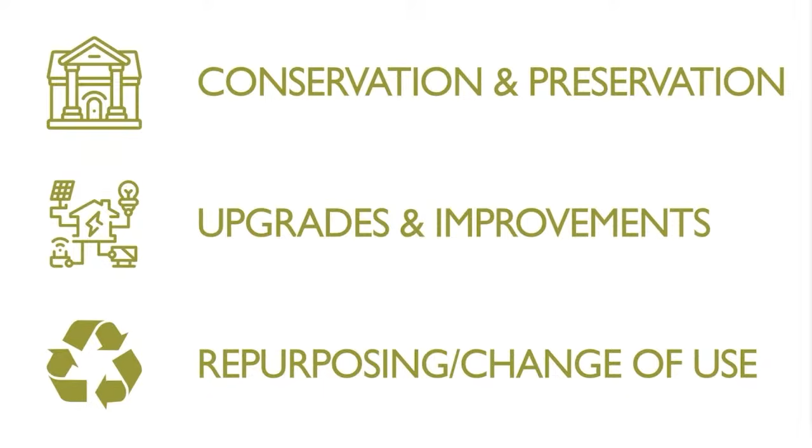Each of the three types of projects will require a different balancing of priorities and will necessitate a different set of trade-offs to meet the overall goal. Having a clearly identified and realistic outcome in mind before beginning works is therefore a very important part of the design process. Conservation and preservation projects, especially those on listed or historic structures, have a number of limitations that may not be present in other types of refurbishments.

Even if retaining the actual period material is not required, the preservation of the essential character and any decorative features certainly is. This requirement can place limits on the extent to which energy performance can be increased, or may restrict the approaches that can be taken to reduce air leakage or control condensation.

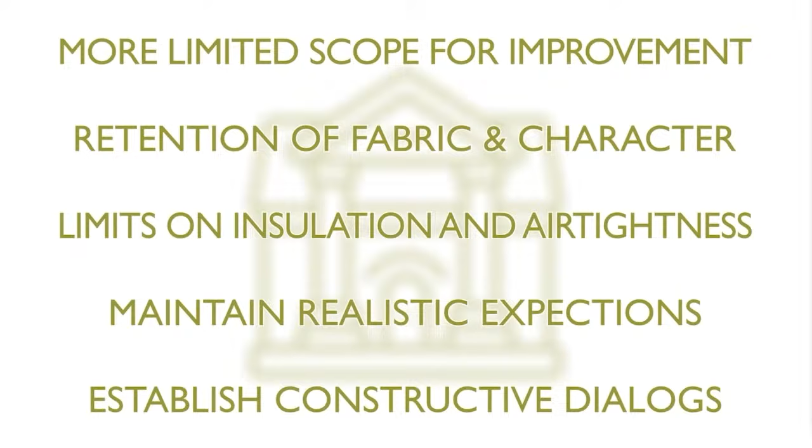Balancing the intelligent use of materials with a realistic expectation of what can be achieved, and agreeing a suitable approach with any regulatory bodies is an important prerequisite. Establishing constructive dialogue between designers, contractors and regulators early in the project cycle helps ensure costs and schedules are kept under control whilst delivering quality results.

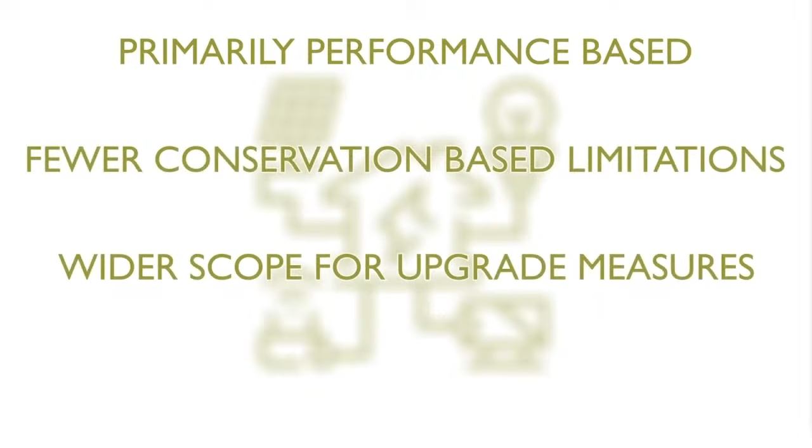Projects where the main focus is upgrade and improvement work flip these requirements so the primary concern is meeting a performance-based objective. That's not to say preserving features becomes unimportant, just that the balance shifts more in favour of enhancement than conservation. Although the layout of the building may still impose limits on what may be achieved, particularly in areas such as window and door openings,

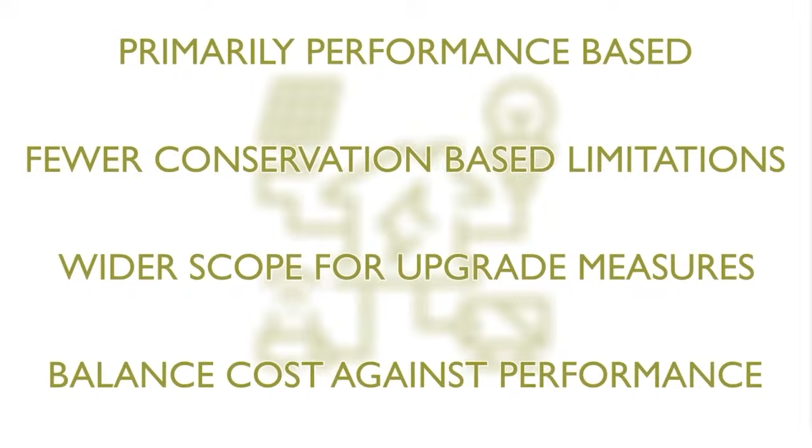there's usually a lot more freedom to accommodate fabric insulation, service runs and other modern requirements. Some thought must still be given to achieving this in the most cost-effective manner, as even without conservation considerations, making substantial improvements to the fabric performance can incur significant costs, if not carefully managed.

The last category is changing the actual purpose of the building itself, which can range from subdividing a large dwelling into flats to conversions of former industrial sites. Depending on the purposes of the building before and after conversion, each project will have its own unique challenges, with acoustic performance being a particular concern when converting from non-domestic to domestic use, as many non-domestic buildings, even relatively modern ones, were never designed to incorporate significant acoustic insulation.

In this case, as with thermal insulation, airtightness and controlling moisture, the critical first step in any project is assessing the performance of the existing building. This achieves two important aims: firstly, identifying and prioritising required works such as repairs, and secondly, establishing a baseline relative to which subsequent improvements can be judged.

While converting a bedroom to a home office or other basic DIY level projects have a pretty clear functional or aesthetic objective, larger scale refurbishment projects require a more structured and objective approach. We'll discuss these approaches later on, but let's begin by reviewing the basics of building physics and how that applies to existing building fabric.

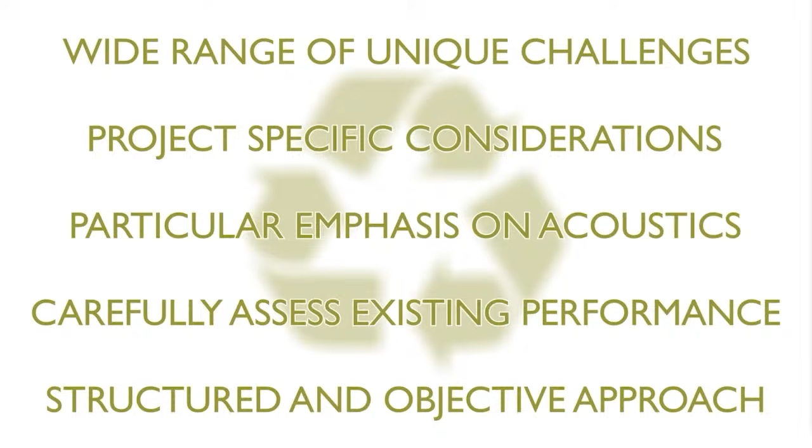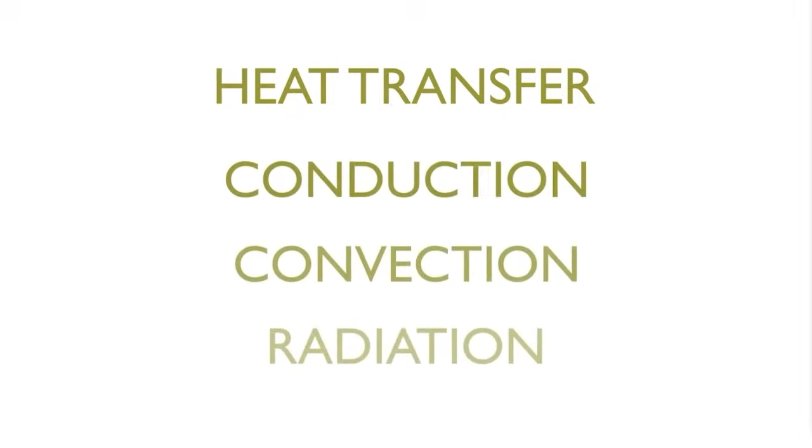The movements and interactions of heat, air and moisture are what influences most of the decisions we make when upgrading building fabric, so it's important to have at least a basic understanding of the mechanisms involved. Firstly, we'll take a look at heat transfer. There are three main mechanisms by which this takes place: conduction, convection and radiation.

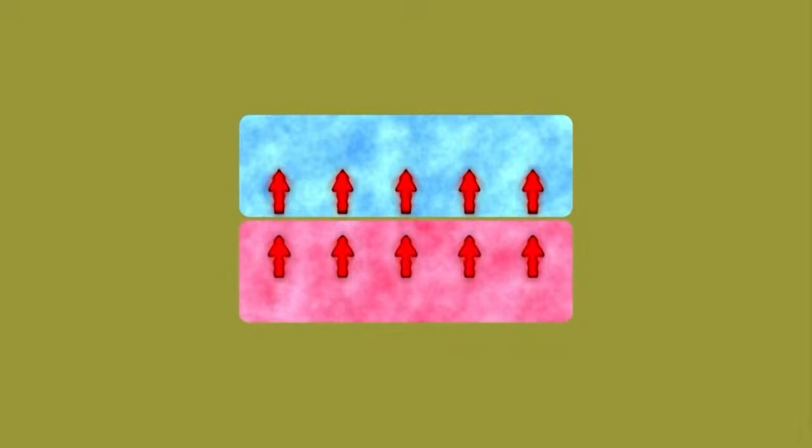Conduction takes place when two objects are in direct physical contact and the heat energy transfers from one to the other. This process will continue either until the contact is broken or the two objects reach the same temperature.

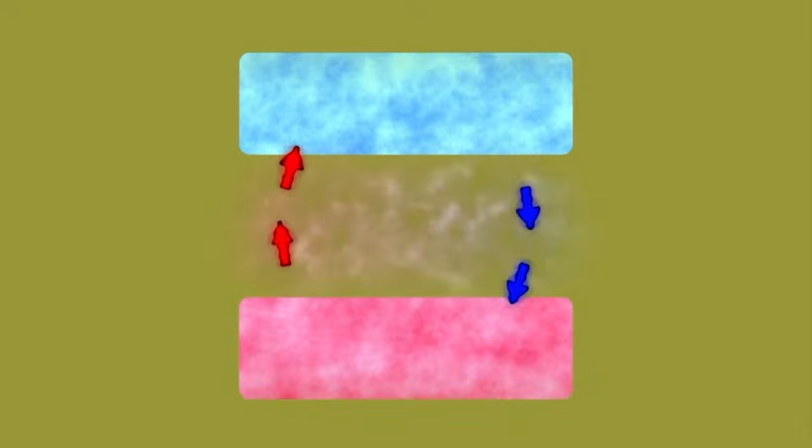Convection is when heat is transferred by a fluid medium, such as air or water. This happens because where the fluid is next to the warmer surface, it heats up. The warmer fluid is less dense than surrounding cooler fluid, and so rises up and is replaced with cooler fluid, and the process starts all over. This sets up a circular current, moving heat between the two objects, which will occur until this movement is restricted, the fluid is removed, or the temperatures equalize.

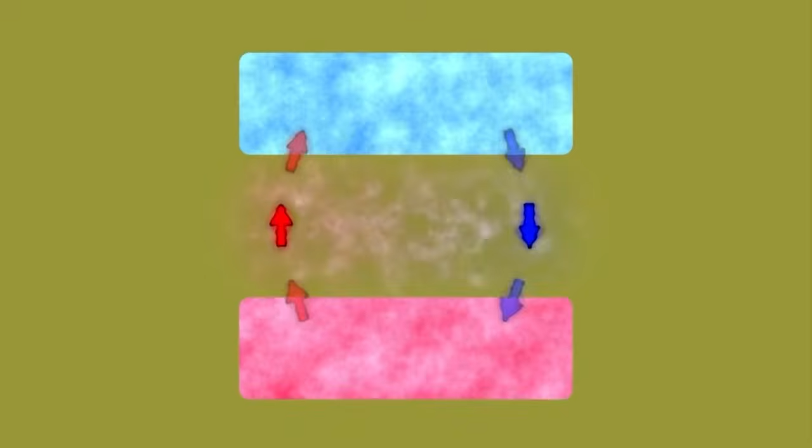Radiation is the final mechanism, and in this case, heat is transferred directly by means of infrared radiation. The first object emits the radiation and the second absorbs it. The rate at which the energy is transferred is determined by the emissivity of the respective materials.

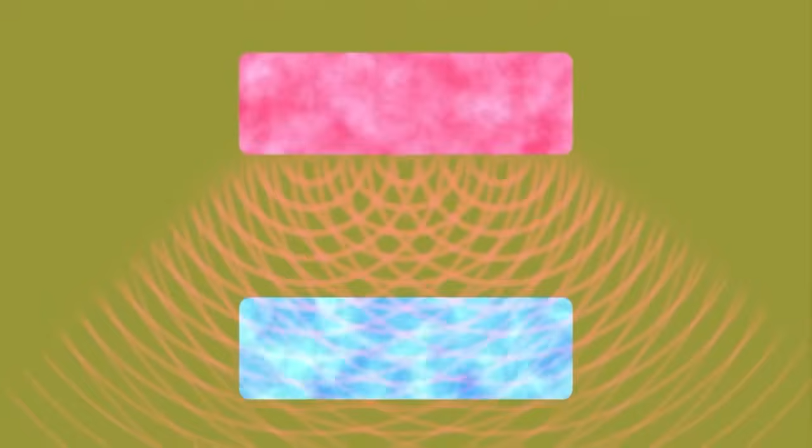In building context, these properties interact in various ways, but for a simple example, let's look at a timber frame wall with insulation placed in between stud-work. This insulation, let's assume it's a mineral fibre, has a thermal conductivity of 0.035 watts per metre Kelvin.

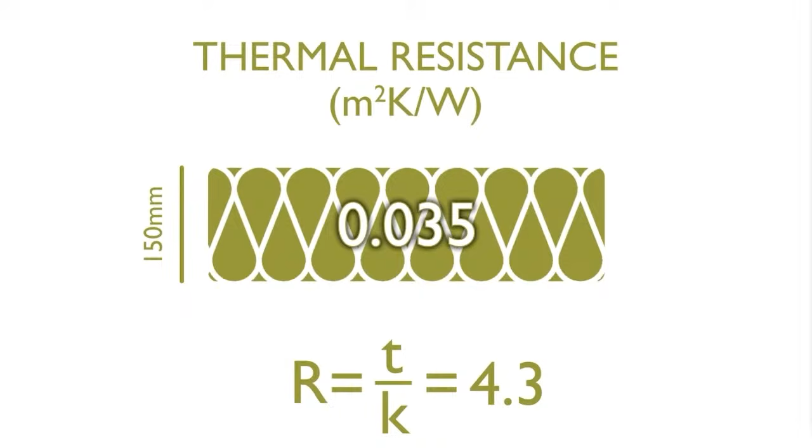This property is a constant, irrespective of the thickness of the insulation. This is also known as a K value or lambda value and is a measure of how well heat flows across the insulation. If we have 150 millimetres of this insulation, we can divide this thickness by the thermal conductivity to give us a thermal resistance, or R value, of 4.3 metres squared Kelvin per watt. This does vary with thickness and is linear. So if we double the thickness, we double the R value. The higher the R value, the better the material resists heat transfer by conduction.

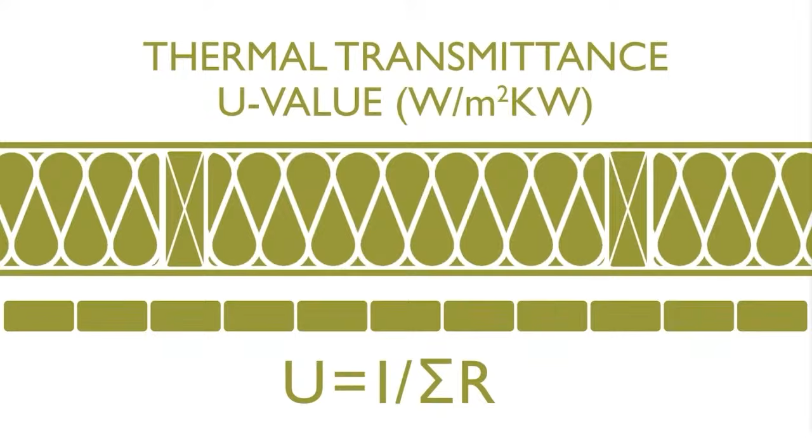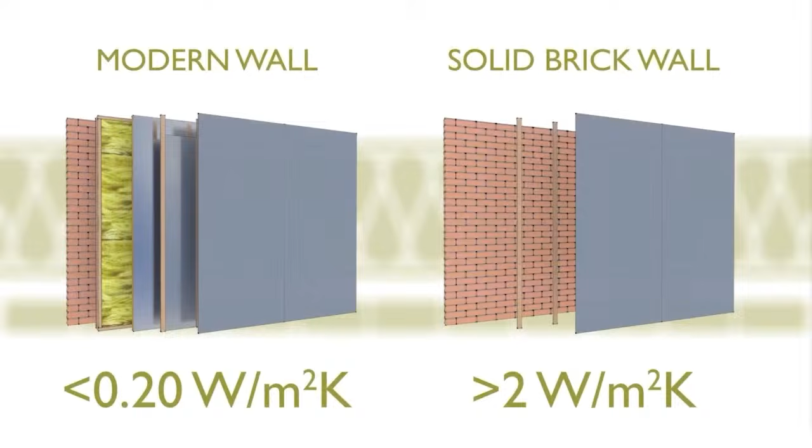The amount of heat flowing through the entire wall assembly is quantified using the thermal transmittance, or U value, which we calculate by adding all the R values together, then dividing one by the result. The U value is measured in watts per metre squared Kelvin, and a lower result is better. Old, solid or stone walls will have a U value of 2 or higher, while a modern new build timber frame wall will be below 0.2. So this really is an area where substantial improvements can be made in older properties, albeit not always easily.

The simple U value doesn't tell the whole story, however, as not all the layers in our example wall are continuous. The insulation in a timber frame wall is typically between studwork, which has a higher thermal conductivity and therefore will allow more heat flow.

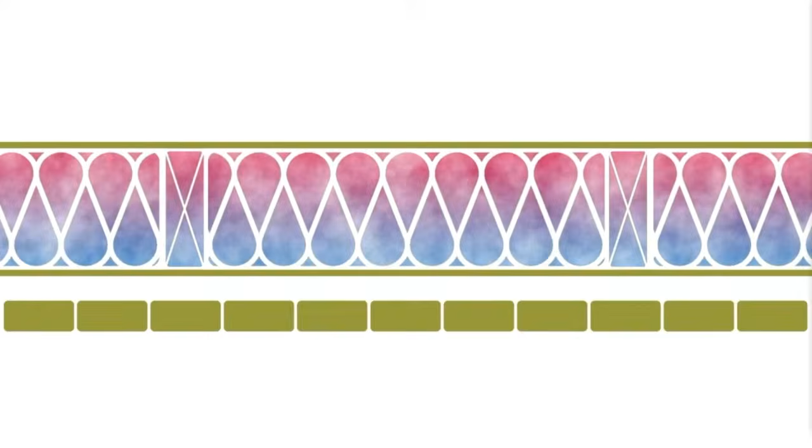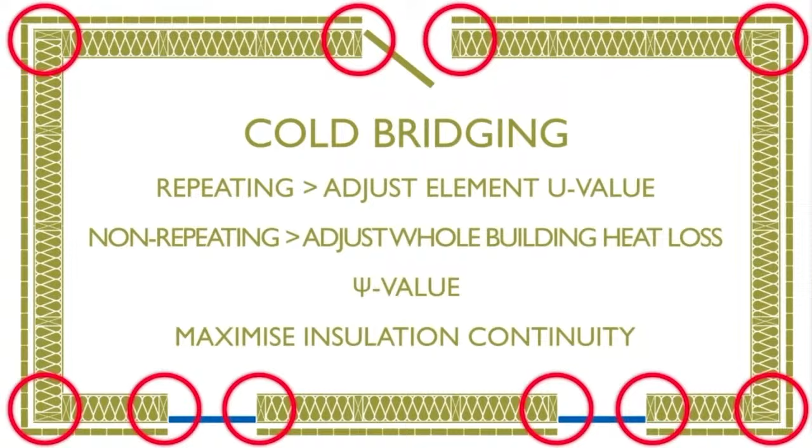There are also windows, doors, corner junctions and floor zones to consider, all of which will affect the local heat flows. This phenomenon is called cold bridging, and we account for this by adjusting the U value of our wall to account for additional timber, and then applying a correction called a psi value to account for the corners and floor junctions.

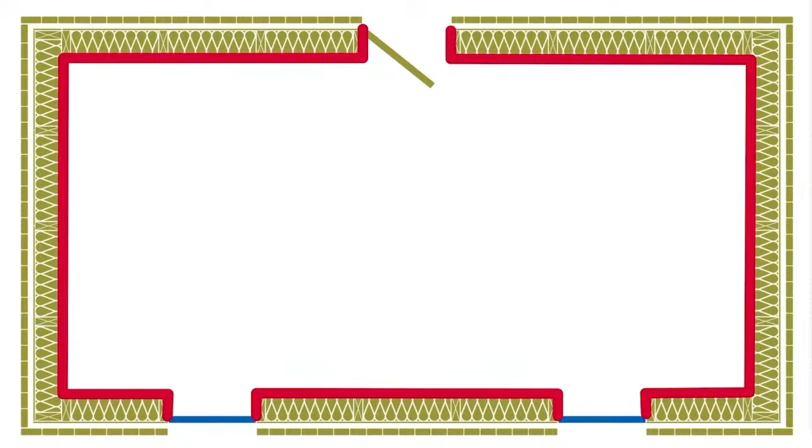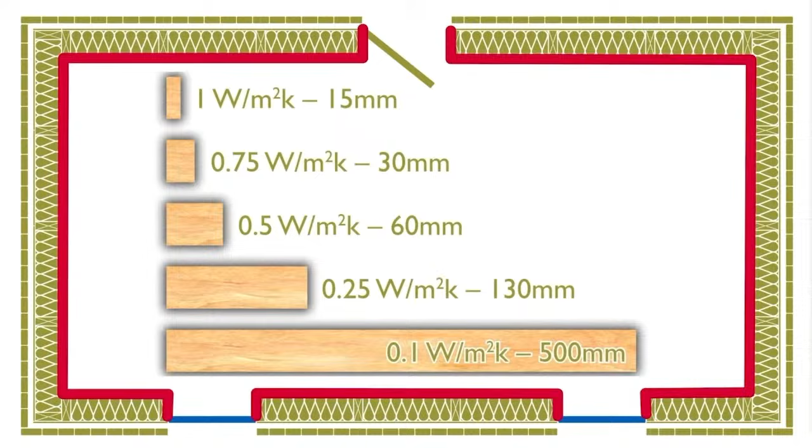The other main area where we can improve our energy performance is by reducing heat losses through convection. This means ensuring unplanned air movement in the building is minimised. Gaps, cracks and poorly sealed penetrations in the building fabric can all allow a substantial degree of air movement, which not only means cold air entering the building in the form of drafts, but also warm air leaking out.

Residents of old houses will be all too familiar with drafts, and how much difference basic steps like using a draft excluder or taping closed old sash and case windows over the winter months can make, and when applied to an entire building it can add up to a dramatic improvement.

The main benefit to reducing air leakage is that it doesn't necessarily add any thickness to the wall or roof, meaning in older properties space can be maintained and period features can be preserved. There are a few ways to improve the airtightness of older properties, which we'll consider later on, but it's important to consider the effect it can have on moisture in the building.

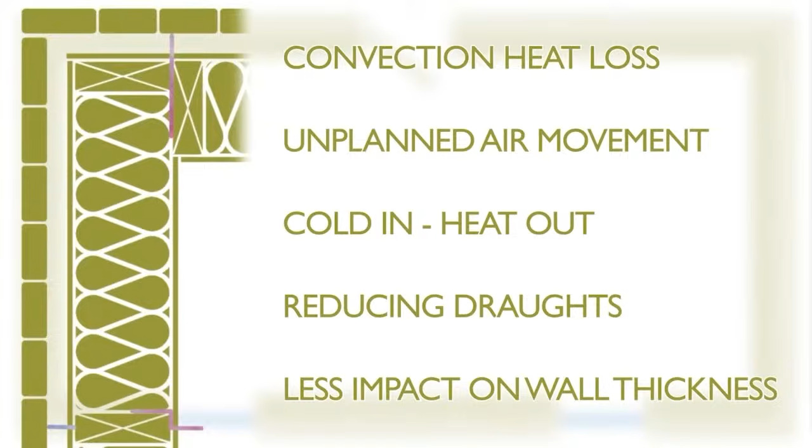All activities that take place in buildings introduce moisture into the internal environment, and while a drafty older building might have been a bit chilly to live in, this air movement allowed an easy route for moisture to escape. If this moisture cannot escape properly, it can lead to condensation problems, where warm, moist air contacts colder surfaces.

Alongside this, traditional building materials like lime mortars and lath and plaster walls have very different hygrothermal properties to their modern equivalents. This means the way they store and transfer both liquid water and water vapour can vary a lot, not least because older materials tend to have highly inconsistent properties.

If we seal up all the drafts and upgrade the insulation without a proper understanding of this existing fabric, we can introduce problems with condensation or damp ingress that cause damage to these materials, often in ways that are hard to detect and remedy. For example, let's consider an existing sandstone wall with lime-based plaster, mortar and render.

This type of wall has a high degree of moisture permeability and has likely reached a degree of hygrothermal equilibrium and maintained this for many years.

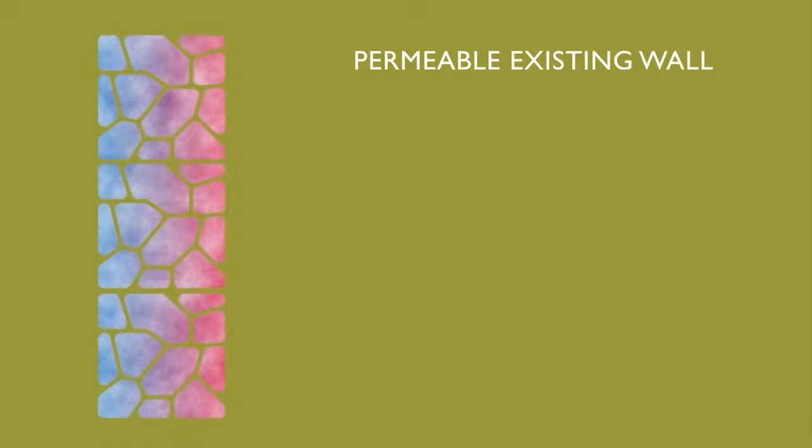If we then add a rigid foam internal insulation system with a low vapour permeability to this wall, that will make the stonework colder, increasing the risk of condensation between the stone and the new insulation. The reduced moisture permeability also limits the capacity for moisture in the stonework to dry out inwards.

A more permeable insulation can offset this by allowing more drying, but will allow more vapour ingress, making this a more complex problem than it may first appear.

When we upgrade our buildings, we need to carefully balance the benefits modern materials can bring against the risk of upsetting the balance of heat and moisture interactions in the existing fabric. So, how do we avoid these types of issues?

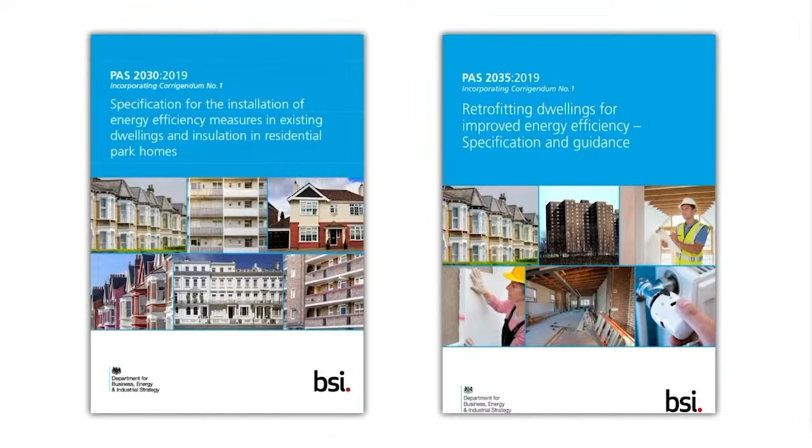The first step is to assess the existing fabric thoroughly, and there are a number of tools and frameworks available to undertake this. The best practice guidance for undertaking energy-efficient focused refurbishment projects is outlined in the PAS 2035 and 2030 documents issued by BSI.

The PAS, or Publicly Available Specification, details the steps, assessments and risks associated with each stage of the process, from assessment and design through to completion and handover.

While the PAS 2035 approach is aimed more towards commercial or larger scale projects such as local authority upgrade schemes, the steps and recommendations are applicable to every refurbishment project.

The document itself also provides a useful framework to highlight the factors that should be considered to deliver any project successfully. It specifies requirements in the following areas: assessment of dwellings for retrofit, identification and evaluation of improvement options, design and specification of energy efficient measures, and the monitoring and evaluation of retrofit projects.

The ultimate aim of the standard is to ensure projects deliver a healthy and more fit-for-purpose environment for the occupants, whilst respecting any preservation considerations.

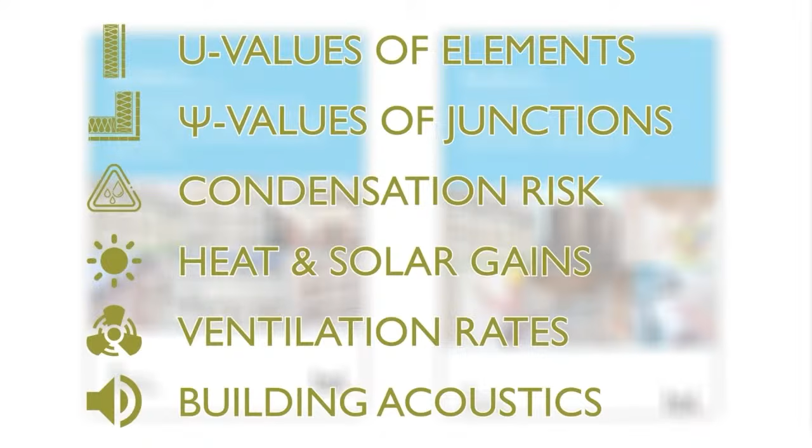The principal factors recommended for assessment are U values of the various elements such as walls, roofs, floors, doors and windows, etc. Psi values of junctions and other non-repeating thermal bridges, condensation risks throughout the structure and the balance of moisture flows, heat gains from occupants, appliances and solar, ventilation rates and indoor air quality.

As PAS 2035 is focused on energy efficiency, it doesn't include acoustic performance in this list, but that's also well worth considering, especially in change of use projects.

Undertaking acoustic testing as early as possible in the project will allow acoustic upgrades to be designed and built in more easily than if applied retrospectively.

While the other areas on this list are relatively predictable and can be assessed by calculation with a reasonable degree of accuracy, the same cannot be said for acoustics.

Making sure the existing performance is properly tested before starting work allows the acoustic impact of all upgrade works to be factored in while changes can still be made easily.

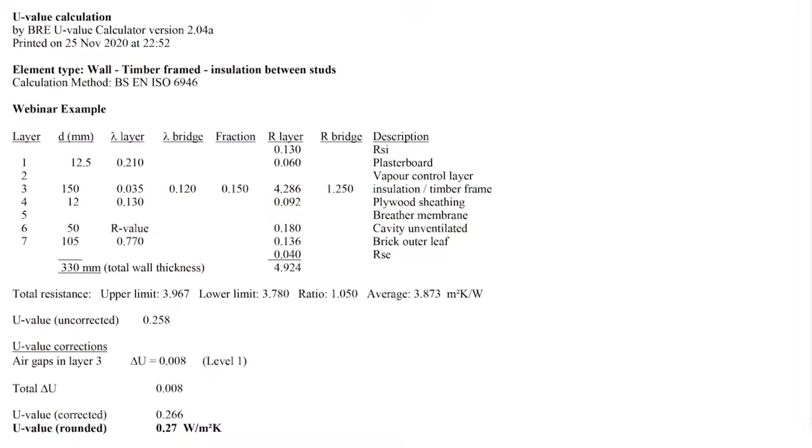What methods do we use to assess these factors? The simplest step in the assessment is determining the U values of the existing envelope, and there's a range of software available to undertake this, but what's important is that the calculation method itself conforms to the methods given in the relevant standard documents, principally BS-EN ISO.

6946-2017. It's also important that the calculation is conducted properly and any assumptions made are in line with accepted conventions.

The standard methods and conventions for undertaking U-value calculations are given in BRE guidance document BR 443 2019, which gives guidance on the incorporation of thermal bridging, adjustments for fixings and air gaps, and other factors that can influence the final calculated result.

While there's a lot of scope for interpreting these factors differently in refurbishment jobs, it's important designers have an understanding of how these work when comparing calculations from different sources.

Whilst most software includes material libraries, it's important the properties accurately reflect the existing building fabric, as it may not be appropriate to substitute the values given for modern materials.

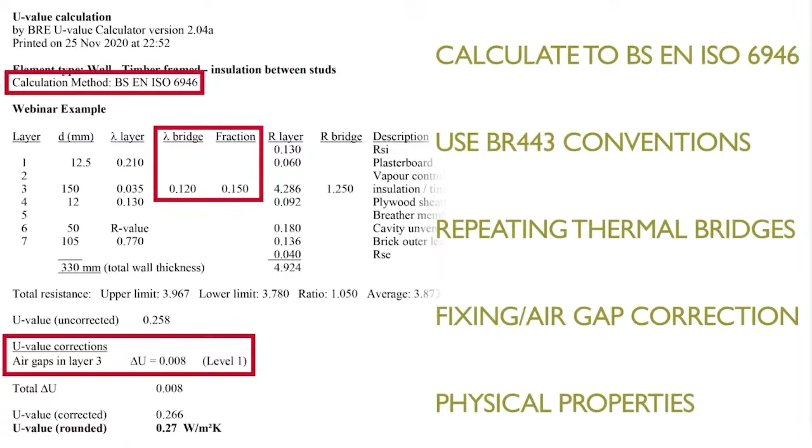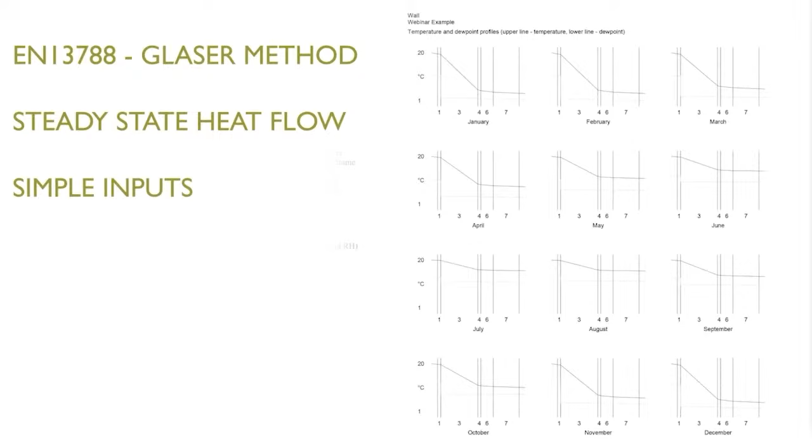Building on the U-value calculation, the next step is hygrothermal assessments. Moisture control measures in buildings are detailed in BS 5250/2021, which references two standards for condensation risk.

BS-EN ISO 13788/2012, Hygrothermal Performance of Building Components and Building Elements, Internal Surface Temperature to Avoid Critical Surface Humidity and Interstitial Condensation Calculation Methods.

And BS-EN 15026/2007, Hygrothermal Performance of Building Components and Building Elements, Assessment of Moisture Transfer by Numerical Simulation.

The 13788 standard uses the steady-state Glaser method to determine condensation risks, and our example here uses the ICOND software, which is linked to the BRE U-value calculator.

This adds an additional layer of values to account for vapor transfer. As with U-values, it's important to ensure the values for permeability are appropriate to the building fabric under consideration.

Glaser uses steady-state heat conduction, along with average monthly temperatures and vapor pressures, to identify vapor diffusion and model how vapor passes through the building fabric. This gives a reasonable assessment with a comparatively simple process and simplifies data input requirements.

However, there are limitations. The main problem is that this method only models moisture vapor flowing in a single direction, from warm spaces to cold, and completely ignores the effects of external moisture sources such as driving rain.

The model also does not incorporate the effects of material porosity, moisture absorption, and water storage within the building fabric. As is stated in the 13788 standard itself, the method assumes built-in water has dried out and does not take account of a number of important physical phenomena.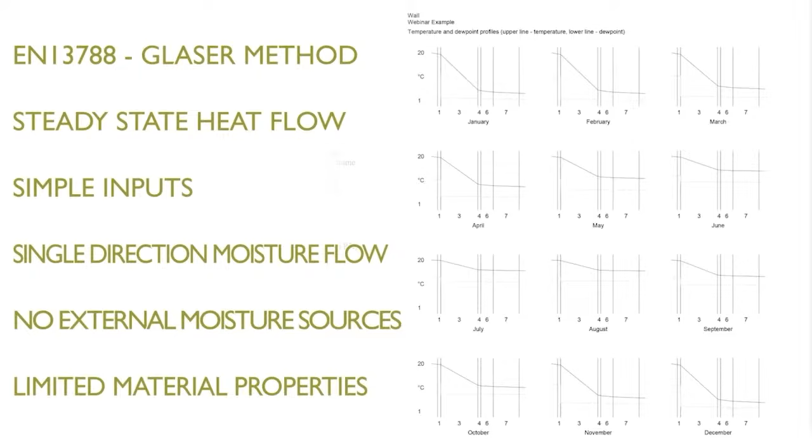The other standard, BS-EN 15026/2007, addresses these issues with a new calculation method based around dynamic numerical simulation of moisture flows.

This type of simulation provides a far more detailed and accurate representation of the way in which moisture both flows and accumulates in the fabric of buildings.

This is the method specified for solid walls with internal insulation in BS 5250/2021, making its use more appropriate in traditional properties where this type of wall is more common.

This more accurate simulation not only allows for greater variations in environmental conditions and material properties, but also offers a more flexible approach to simulation time periods.

Designers can look at minute-by-minute predictions of the building performance, taking many years into the future if required. This additional detail in time can often reveal small problems that can grow to cause severe issues over the years, issues which would commonly be missed by a simple Glaser method calculation.

The trade-off to using more advanced methods is more complex simulation software and outputs which are more complex to determine.

Moving on from this, the energy efficiency of the entire building can be assessed. PAS 2035 recommends two methods for undertaking this: the SAP, or Standard Assessment Procedure Calculation, and the Passive House Planning Package, or PHPP.

Both of these methods incorporate a wide range of data covering all aspects of the building fabric, orientation and systems, and will give a detailed and comprehensive overview of the pre- and post-upgrade performance.

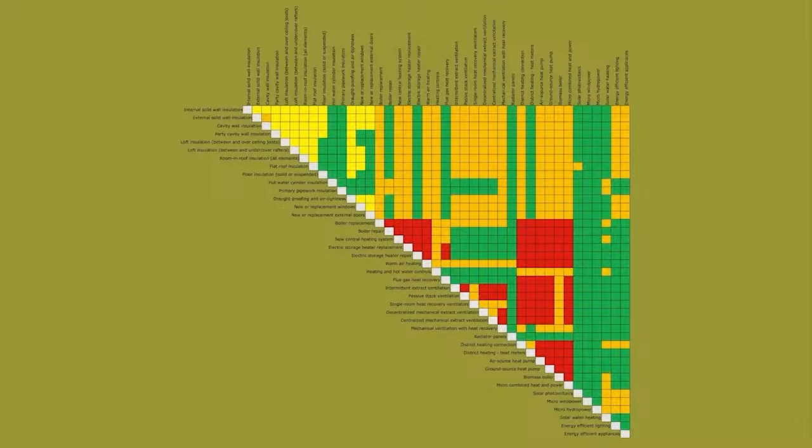This holistic approach to design is well illustrated by figure D1 in PAS 2035, the Measures Interaction Matrix. This provides a simple, at-a-glance overview of the likelihood of incompatibilities and problems arising between various upgrade works.

For example, by looking at the matrix, systems which are not appropriate to be used together are highlighted red, such as the combination of decentralized mechanical extract ventilation and heat pumps.

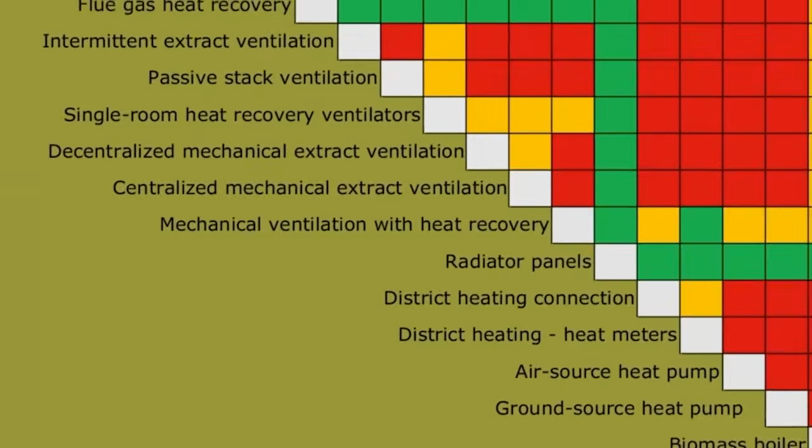Orange interactions, such as that between electric storage heater replacement and heating controls, require additional consideration to ensure compatibility and may require additional complementary upgrade works.

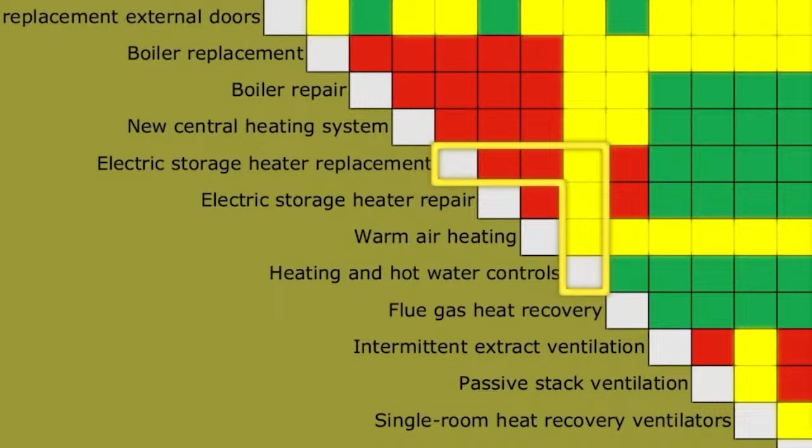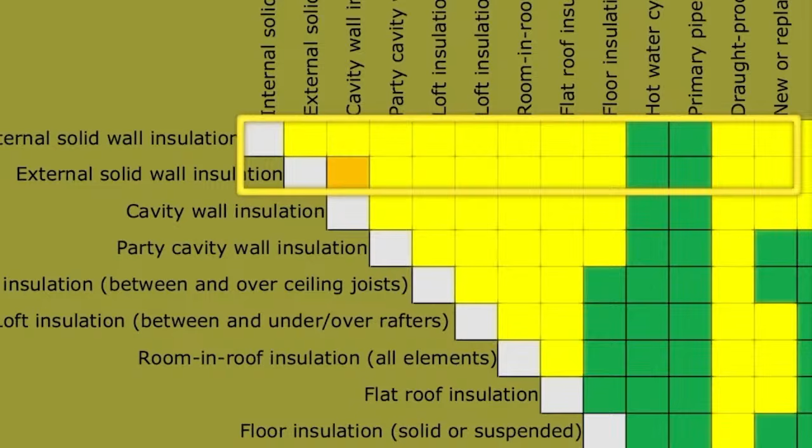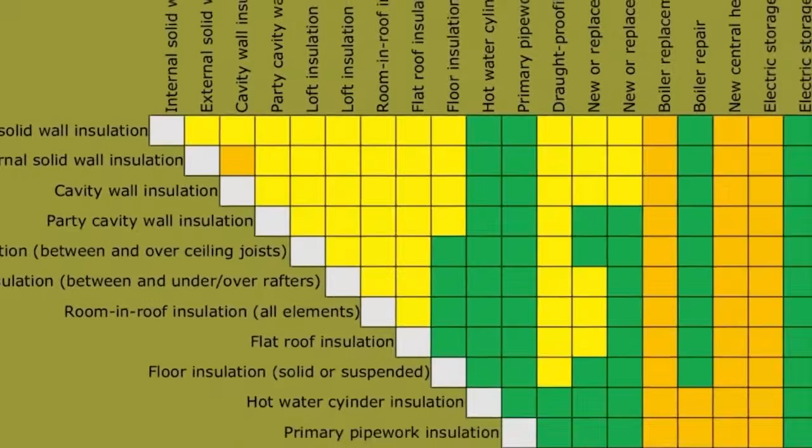This is also true of yellow measures, such as a combination of upgraded doors and windows and internal or external wall insulation, but to a lesser degree, more related to ensuring good detailing and proper installation rather than significant changes to individual specifications. Green areas, such as draft proofing and solar PV, have little or no interactions or effect on each other, and therefore represent a very low-risk combination.

The concept of risk in the specification of retrofit is further expanded upon in PAS 2035, with the project itself and individual measures being assigned degrees of risk. Depending on the nature of the project, three risk-based pathways are identified, A being the lowest risk and C being highest. Risk in this context can be considered analogous to complexity.

For example, upgrade work to replace the windows of a single house outwith conservation areas and of conventional construction will pose very little risk or complexity.

By comparison, fitting internal insulation and mechanical ventilation with heat recovery to a listed solid-walled property will be graded much higher. Upgrade measures are also graded 1 to 3, with simple upgrades like draft proofing and hot water cylinder insulation at 1, and complex and disruptive measures like ventilation systems and heat pumps graded 3.

The higher the identified risk pathway, the more pre-assessment measures are recommended, along with increasingly detailed project specifications and higher recommended qualifications for specifiers and installers.

The recommendations in all areas are extensive, so the PAS 2035 document, along with the accompanying PAS 2030, which covers installation processes, are well worth a read for anyone regularly undertaking retrofit projects, especially at scale. The processes and detailed recommendations are also a useful framework for anyone wishing to understand what's involved in upgrade works, even if the full framework is not being applied to the project.

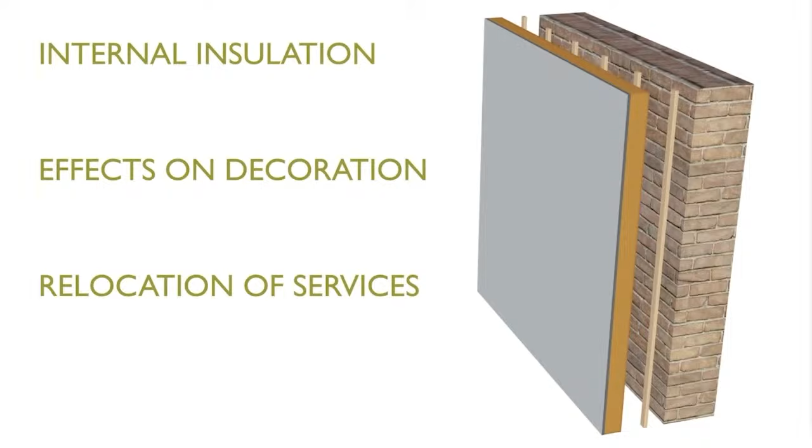In such areas, even where not explicitly defined as a conservation area or listed building, the application of external insulation systems may not be desirable or practical. Internal wall insulation systems overcome a number of these problems, but typically introduce a few of their own.

The main issues that can arise from internal systems are disruption to surfaces and decorative features, and condensation risks. The thickness of the internal insulation system can lead to extensive additional works to relocate switches, sockets, and other services to accommodate the thicker walls, or cause problems if period decorative features such as cornicing must be retained.

Ultra-thin insulation systems such as aerogel laminates, some with thicknesses as low as 13mm, can go a long way to mitigating this. Because of the exponential nature of U values, even such a thin board can make a significant improvement thermally if no existing insulation is present.

But getting closer to the insulation levels of a modern home will unfortunately necessitate a little disruption even with such high-performance systems. When using systems such as aerogels, all product details and installation practices should be reviewed in the context...

...of the Control of Substances Hazardous to Health 2002 regulations, and manufacturers' installation guides and material safety data sheets should be consulted. Such products may require different installation practices when compared with traditional insulation materials, and specific data for the specified product should be reviewed.

The fire performance of the system should be considered. Facing boards used in laminated systems, such as plasterboard or magnesium oxide, are typically classified as A1 or A2 under the EN 13501 Part 1 2018 standard, so they will comply with all Approved Document B standards for linings, but in some situations additional requirements may apply.

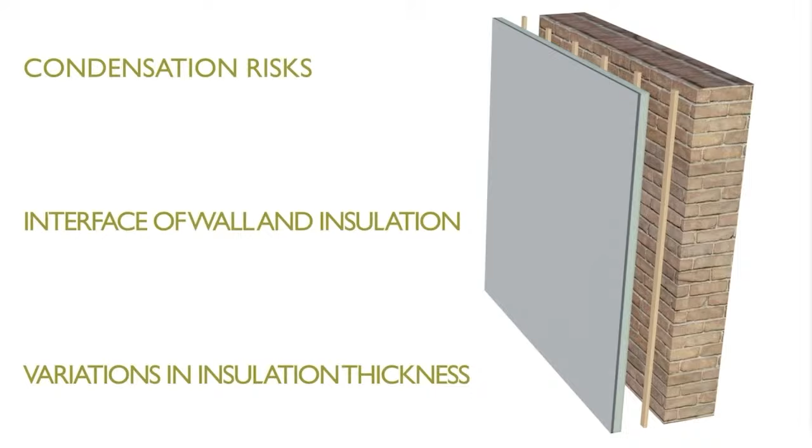Another issue, condensation risk, comes in two forms. Firstly, the risk of condensation forming at the interface between the insulation system and the original wall beneath. And secondly, risks arising in any area that cannot be insulated to the same degree as the main wall. In the first case, problems can arise because adding insulation to the wall makes the underlying building fabric colder than it would otherwise be, increasing the likelihood of the dew point occurring in this area.

Avoiding this type of situation can generally be accomplished by hygrothermal analysis, using a dynamic simulation over an appropriate time period. By accounting for the moisture storage capacity of the materials and assessing the potential for inward as well as outward drying, this type of simulation can identify the optimum combination of vapor resistance and thermal insulation levels to minimize any negative moisture effects.

The inherently permeable aerogel insulation systems offer a variety of thicknesses and can be specified with or without an integrated vapor control layer. This allows both the thermal and vapor resistance to be tailored to the specific project requirements, as assessed via WUFI dynamic simulation.

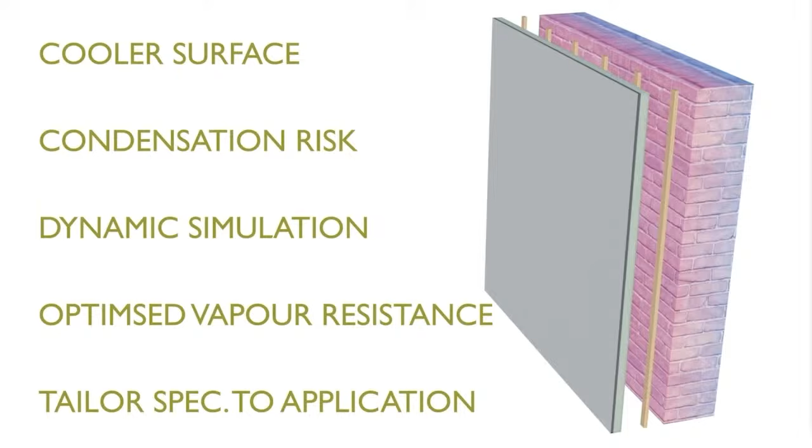In the case of window and door reveals, it's often difficult or impossible to introduce insulation to these areas without compromising the opening size and obstructing the glazing or opened areas. Whilst the effect of not insulating these areas on the overall heat loss is not huge, the bigger issue is condensation.

If the majority of the wall area is insulated, but the reveals are not, the warmer surface of the insulated areas is offset by a decrease in the surface temperature where no insulation is present. So internal wall insulation will actually make an uninsulated reveal colder than it was prior to the upgrade. This reduced surface temperature can give rise to surface condensation at the reveals, a problem only increased by the relatively lower temperature adjacent to the windows.

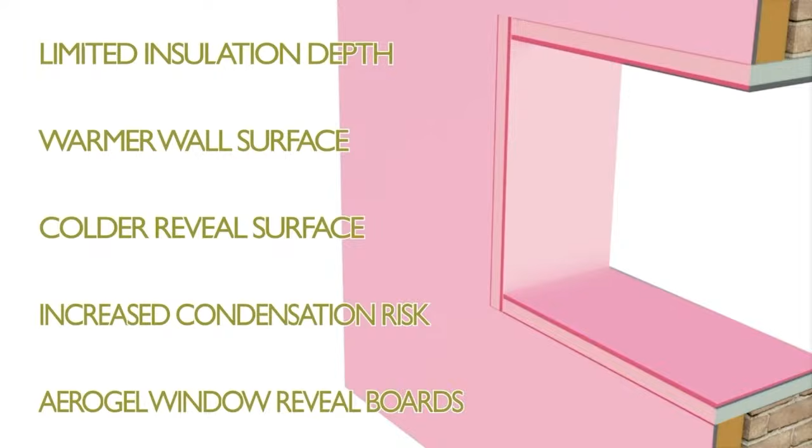Reducing this condensation can be achieved by adding even a minimal level of thermal insulation, bringing the surface temperature closer to the overall average for the wall surface. Again, a thin, high-performance aerogel laminate system can meet this requirement without unduly encroaching on an open area.

Such systems are available with A2 or better fire ratings, allowing them to be used in most circumstances, including facades and high-rise projects where additional fire performance requirements are necessary at over 18 metres, under Approved Document B in England and Wales, and over 11 metres in Scotland.

This combination of fire and thermal performance can be particularly useful in larger scale projects such as facade retentions, by allowing fire and thermal bridging risks to be addressed with one system.

If an A2 rated system is specified, it's important to ensure fire testing data and certification is both up to date and relevant to the application under consideration. This may vary considerably between systems, so as with any application where fire performance is a consideration, involving system manufacturers and installers early in the design process is recommended.

As we discussed earlier, reducing the air leakage rate of a dwelling is often a more effective route to improving a building's energy performance, whilst adding minimal added thickness. How this can be achieved in a retrofit situation is, however, not always straightforward.

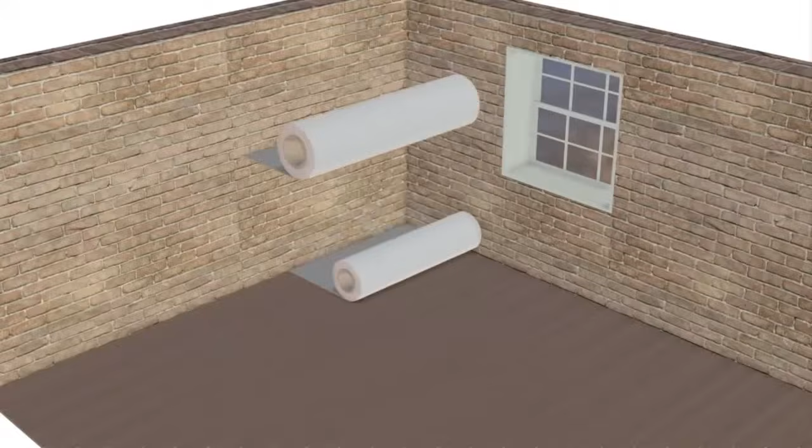Applying draft strips to doors and windows or completely replacing doors and windows will go a long way to reducing air leakage. In other situations, such as old floorboards or over-ventilated solums, or when fitting new internal insulation to a more air-permeable structure, it's more complex to achieve.

The principal issue in such situations is how to limit air movement whilst ensuring no moisture is trapped. While lining the walls and floors with a polythene membrane may seem an obvious solution, this can also lead to problems as such a membrane may affect the flow of moisture across the element.

As we saw in the dynamic assessment of moisture flow, inward drying and the ability of the building fabric to absorb and release moisture is an important component of maintaining hygrothermal equilibrium. So the challenge is how to introduce an airtight layer without preventing this free flow.

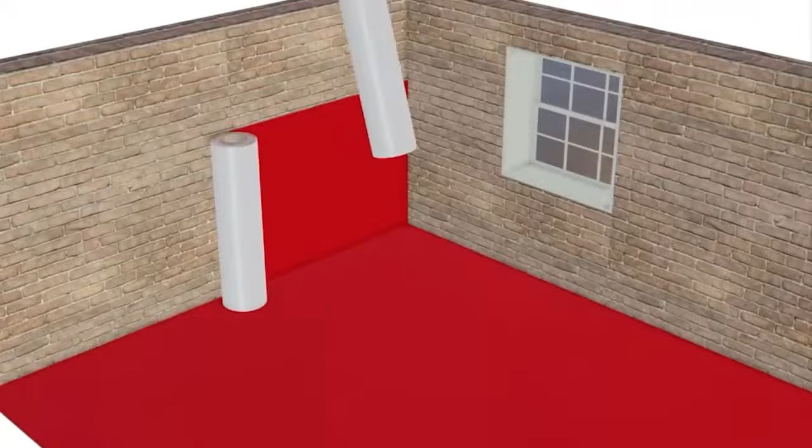In these situations, a vapor-permeable self-adhesive air barrier membrane would provide a simple and moisture-neutral solution. Being self-adhesive, this type of membrane simply bonds onto the existing wall surface, providing an effective air barrier without impeding the movement of moisture vapour in either direction through the wall.

The moisture-neutral property of this material means insulation can be added without causing a condensation risk, regardless of where in the wall or floor the insulation and air barrier are placed. In refurbishment projects, this ability to locate the airtight layer more or less anywhere gives additional flexibility that may simplify the installation of services. Fire protection measures such as sprinklers or alarms, which will be required for most retrofit projects, can cause damage to airtight layers if penetrations are not adequately sealed. If the air barrier can be located away from such service runs, the potential for damage is minimised.

To avoid puncturing the membrane, the finished floor must be installed as a floating floor, and it's recommended that a protection fleece or fibre mat be considered for additional protection. This allows for effective sealing not only of surfaces but also junctions, for example between a timber floor and a stone wall.

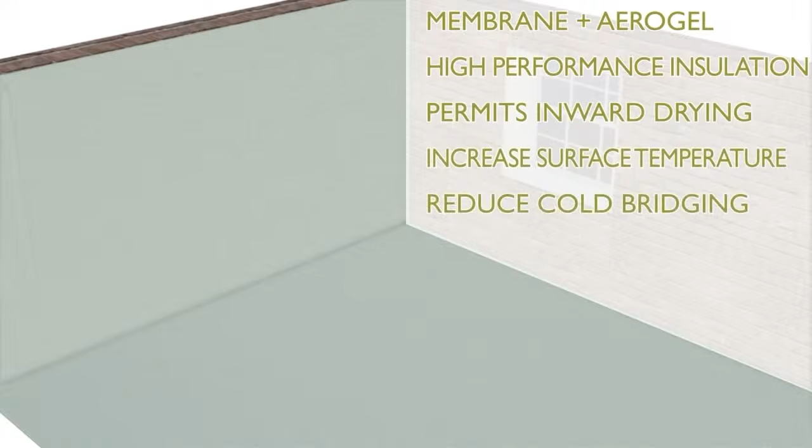Products that combine vapor-permeable aerogel insulation with a self-adhesive membrane provide a highly efficient thermal break as well as an air barrier. Because of the moisture vapor permeability of the aerogel insulation, it helps minimise moisture and damp problems, not only by permitting drying in any direction, but also by increasing surface temperature and helping reduce cold spots associated with cold bridging. Such insulation panels can accept most common floor coverings.

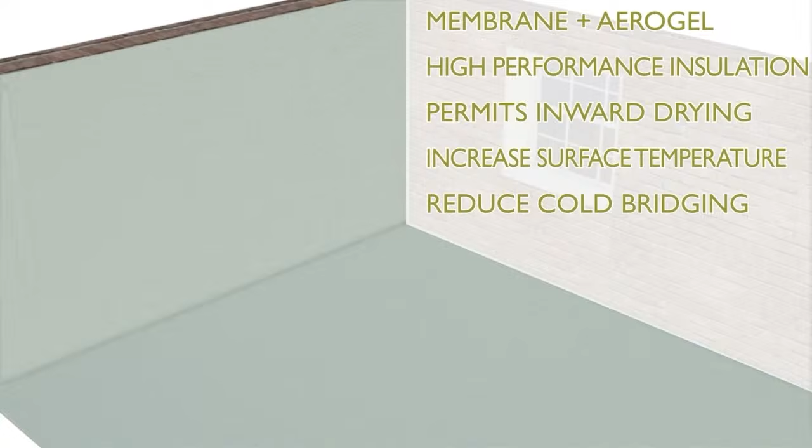However, if a non-flexible floor finish such as laminate, engineered wood or ceramic tiles is specified, the advice of the floor covering supplier should be sought, as special measures may be required to accommodate possible deflection in the insulation panels. This degree of movement is small, similar to that experienced when laying onto acoustic floor panels. However, additional measures such as flexible grout adhesive and/or additional plywood overlays may be recommended depending on the individual flooring product.

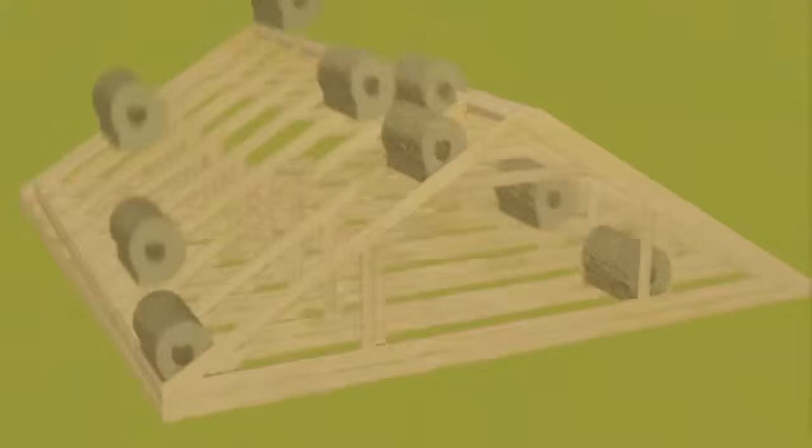The final scenario we will consider is a re-roof, a daunting prospect for any building, but particularly difficult in traditional historic properties, which may have a variety of period details and features as well as less straightforward plan layouts. In roofs with complex geometry or rooms in the roof, it's not always simple to ensure ventilation can provide adequate airflow throughout the entire structure.

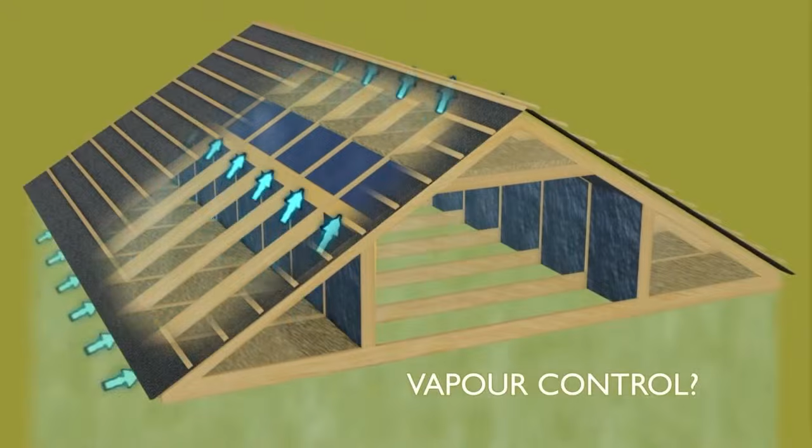A lot of existing roofs rely on air movement through leaky fabric, with lots of gaps and cracks to ensure moisture vapour can escape, so the lack of condensation problems can be more a case of luck than good design. Such systems cannot always be depended on to perform similarly post-upgrade, particularly if energy performance upgrades substantially alter the hygrothermal characteristics of the building fabric and envelope. Another particular problem is the condition of the existing ceiling, the performance of which may not be known.

Some modern roofing membranes require the addition of a vapour control layer, or that the ceiling be well sealed in accordance with the BS 9250/2007 standard. And as with the provision of ventilation, this cannot be relied upon without a full replacement of the ceiling, which may or may not be possible or desirable.

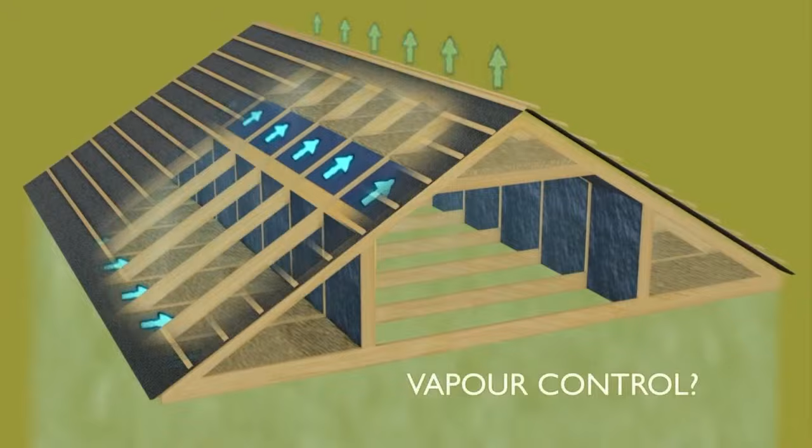Taken together, these two facts make the choice of roof underlay crucial in ensuring the roof remains trouble-free after the upgrade works are completed. This is especially true if there is a large amount of wet trades involved in the refurbishment, as this additional moisture load must dry out over the initial heating periods. A well-designed and fail-safe roof construction can not only simplify the construction process, but will reduce the necessity for ongoing maintenance or remedial works, especially if subsequent changes of use or further alteration is anticipated.

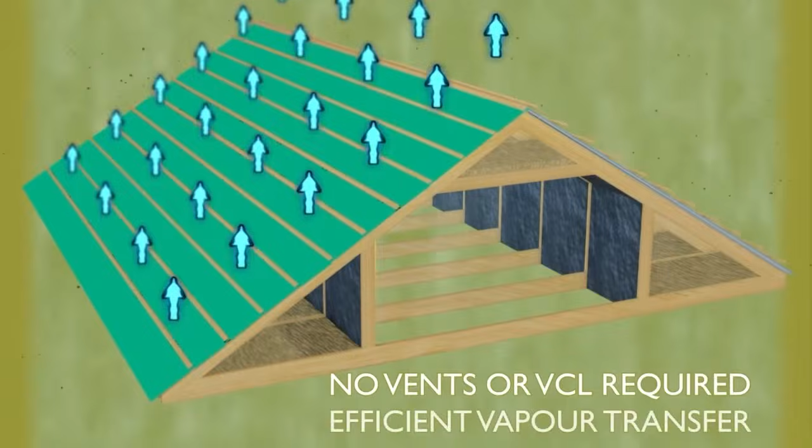Although underlays are not exposed to fire from external sources, the finished roof covering should be classified appropriately to BS EN 13501 Part 5, 2016. The critical feature of any underlay used in such work must be the ability to accommodate as wide a range of existing situations as possible without requiring extensive additional enabling works.

Particularly in historic or listed properties, getting the outer roof covering removed or any repair work done and the outer covering reinstated in the shortest time possible is paramount.

Air and vapour permeable underlays do not require any additional ventilation below the underlay, nor do they require any special air or vapour control measure at ceiling level. Being air permeable, air is able to flow in and out across the entire surface of the roof, ensuring the most efficient transfer of moisture vapour possible, even during the initial dry-out phase after completion. This simplicity allows for trouble-free specification and installation on any size and shape of roof, with minimal changes to the existing building fabric required, meaning the roof can be reinstated as quickly as possible.

Additionally, Construction Design and Management Regulations 2015 set out the duties placed on designers, and these must be referenced by both the architect specifying the system and the product manufacturer and installer who are designing the system.

Responsibilities include the duty to eliminate, reduce, or control foreseeable health and safety risks through the design process, such as those that may arise during construction work or in maintaining and using the building once built.

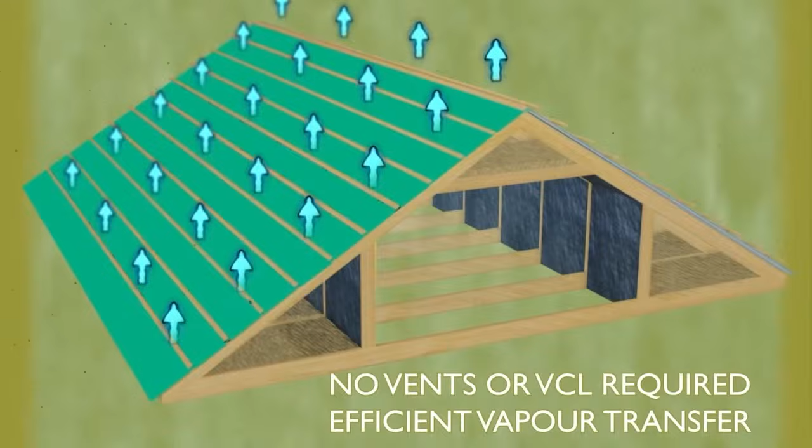Whatever your role in construction, CDM aims to improve health and safety in the industry by helping you sensibly plan the work so the risks involved are managed from start to finish, have the right people for the right job at the right time, cooperate and coordinate your work with others, have the right information about the risks and how they are being managed, communicate this information effectively to those who need to know, and consult and engage with workers about the risks and how they are being managed.

In this context, the faster and simpler installation inherent in removing the ventilation requirements reduces the need for work at height, both during construction and due to remediation.

And that concludes today's webinar, so we'll now move on to the Q&A session.